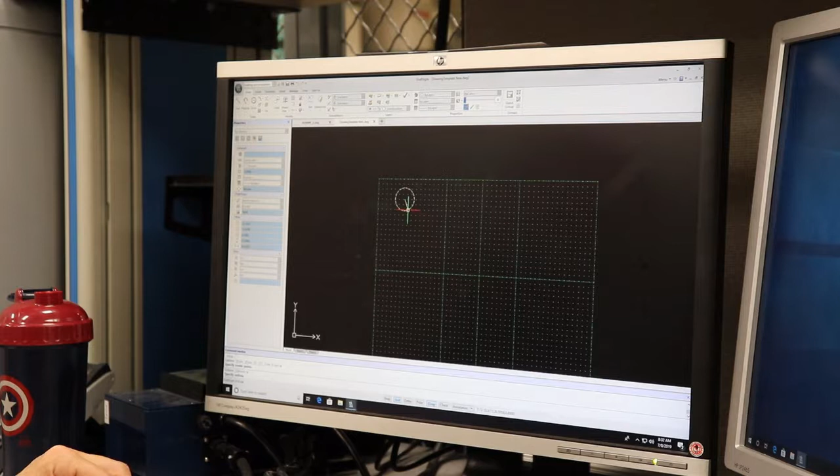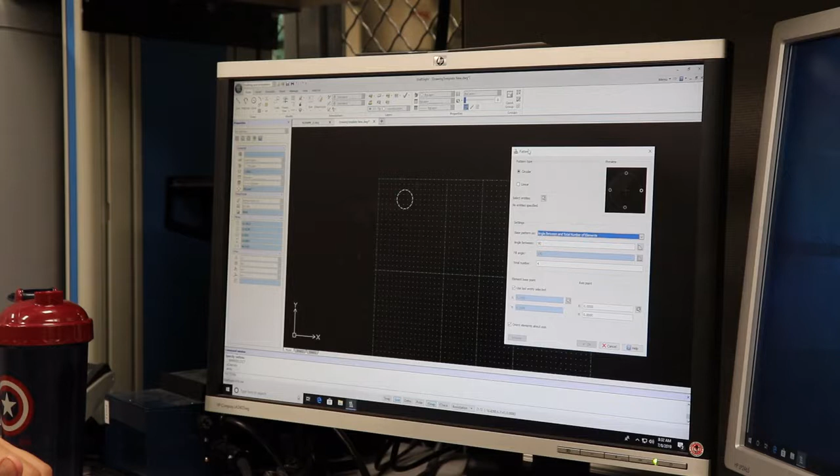So let's see, circle, and I'm just going to put it there, whatever. I'm going to select that. This command in DraftSight is called pattern, but it also recognizes the array command. I'm going to type array - oh, it says 'did you mean pattern?' Yeah, I did. Okay, so linear, form 4, 1 inch spacing, yeah, sounds good. Select entities. Oops, maybe.

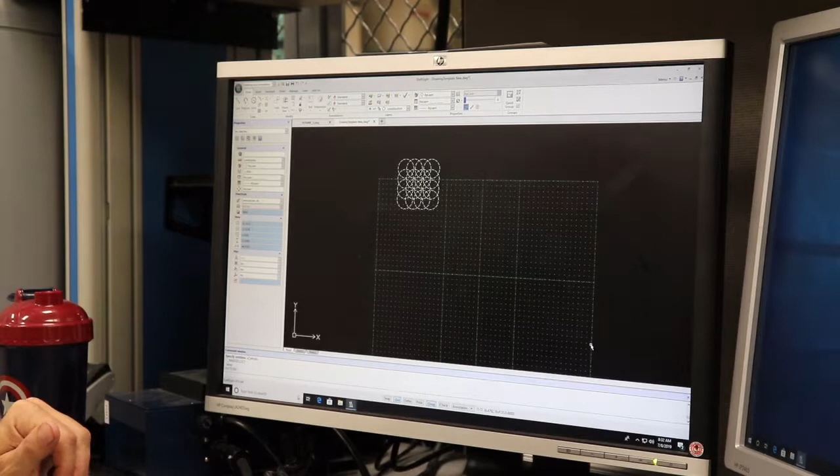So we want to do a linear array. I've already got my entity selected, so it says okay, do this. All right, and there it is. So it's really that easy.

I love being able to type on the command line. That's just what I do. That's how I think, because that's what I learned. So anyhow, here we are.

I'm going to try to find where I saved this last time, because I don't remember. Probably would have saved it under personal. Reamer holder, no. Tool holders - hey, how about that? All right, Cat 40 tool holder top. Open. There we go. There it is.

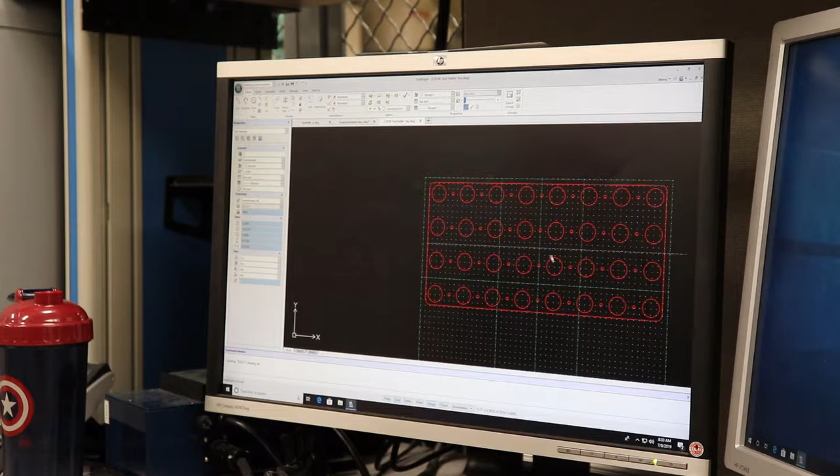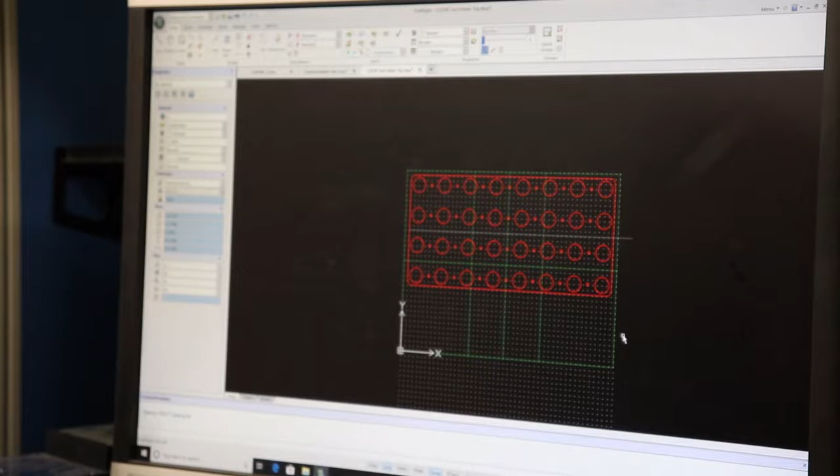All right, so you see this green templated area. All that is a reference for me - this green templated area right here is a reference. This is the cutting area of my laser cutter. Let's get you a little closer to that. So this green templated area right here, that is the cutting area of my laser cutter.

So the way I've got this set up is that I can engrave, I can cut, and I can do construction lines. When I set up this template, I use red and I set up my line types correctly so that if it's on the cut layer, the line thickness is 0. Engrave, it's 0.2 millimeters or larger. And then construction is white, and that just allows me to develop the geometry of my part. Very, very useful.

This is probably one of the more user-friendly CAD programs out there. It does have a few quirks, but I've been really happy with it over the last couple of years.

So that's on a construction layer, on a vector cut layer. Let's say I wanted to turn that into an engrave. Maybe I can find my engrave layer. There it is - and now all of a sudden it's green.

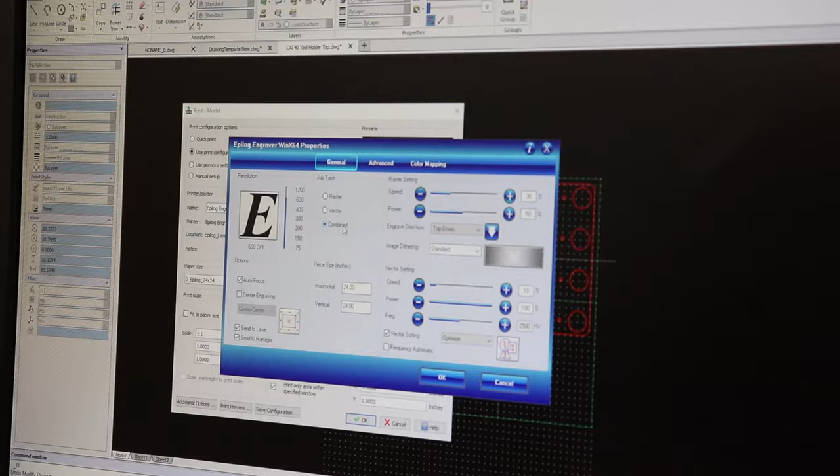All right, and so this is one of the quirks. I press OK because it changed the properties, and then poof, it loses the configuration. It just is what it is. When I first started using this, it drove me crazy. I go back in and check. Now, as long as I don't hit OK, I don't lose anything. If I just exit out of it, it's good.

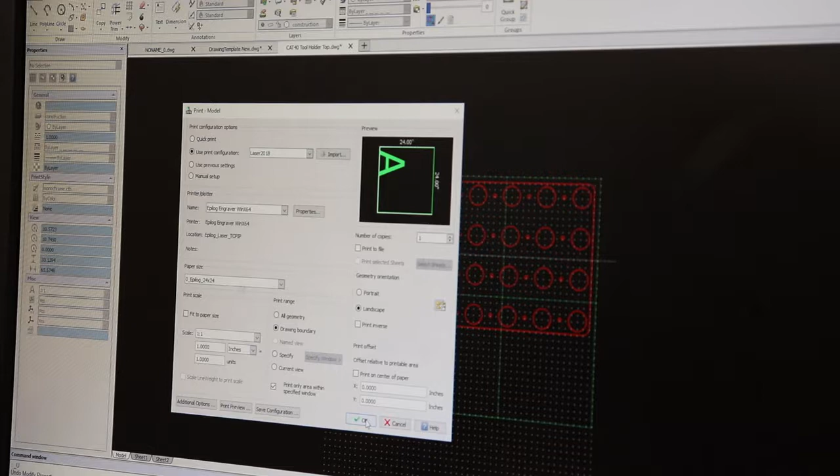And then I'm going to press OK, and it's now going to send that job to the laser cutter. So let's go take a look at the laser cutter.

Okay, so here we are, Epilog laser. This is a 60 watt. The material that I cut is this real inexpensive stuff. It's designed for floor underlayment, and it's called Luan, L-U-A-N. Lowe's sells it, it's about $15 for a 4x8 sheet. I have them cut it with their rip saw at 18 by 24, and so then I use that here in a laser cutter.

So we'll go ahead and turn that on. Alright, so I got air, and turn on my evacuator. Not sure how the directional mic is going to go with that. And so I have it set on autofocus, so it's going to come down. Activate the plunger.

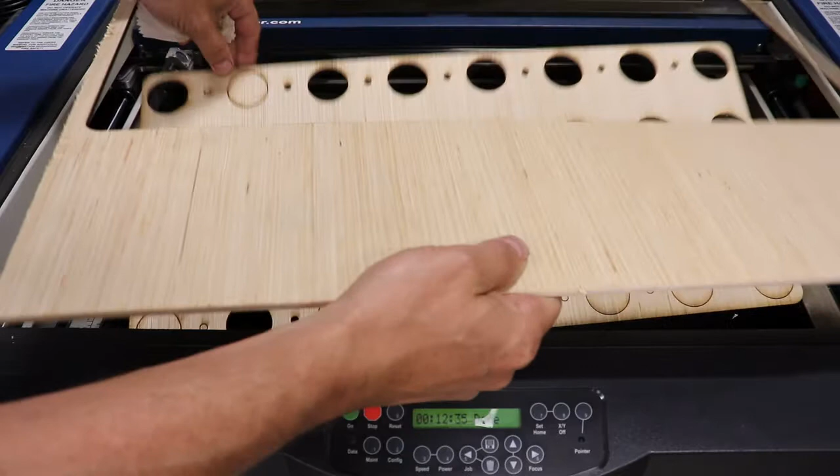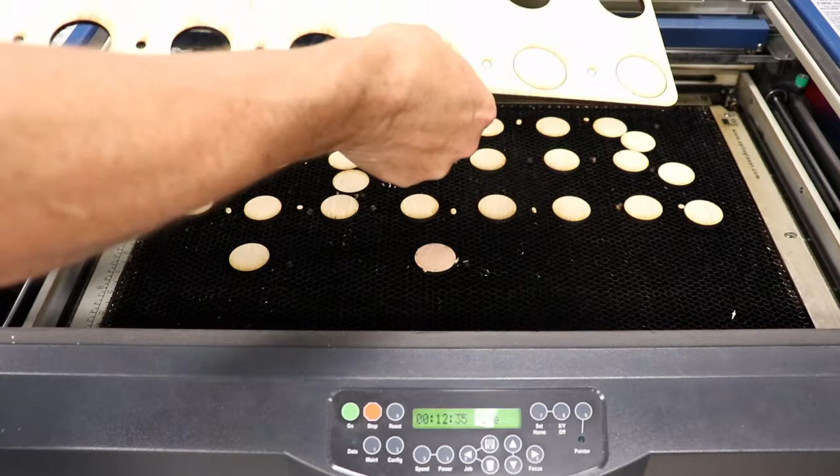Problems with using the Luan is that you don't always get a full clean cut through. It's usually not terrible, but you get spots that don't cut all the way. I could just recut a second time, catch them all, but for something like this, it's not really the right plan.

Okay, here we get ready to start on the bottom. Again, same material, Luan. It has the same outer profile, but all it's going to have is small through holes so that I can screw these two tabs together. So here we go.

Never gets boring watching this thing go. It's kind of mesmerizing. I don't know what the heck it's trying to cut. Apparently I got something hidden.

I went a little overboard with the support holes. I'll probably only use half, maybe not even half, because the supports are kind of a pain thing.

BT40 tooling is heavy, but all this does is sit on the shelf and keeps them from banging around on each other, and keeps them so that you can see them and select what you want.

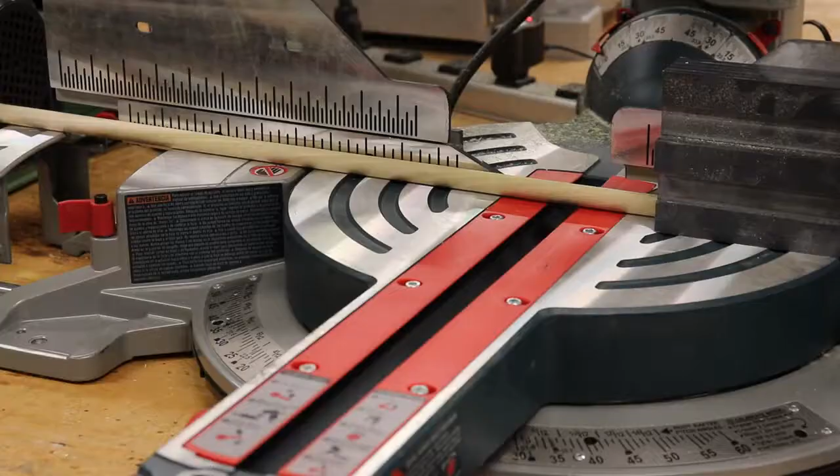So I just set up a stop, and then go through and I cut whatever I need, and that gives me a nice consistent cut on these, and these are the standoffs that go in between the two halves.

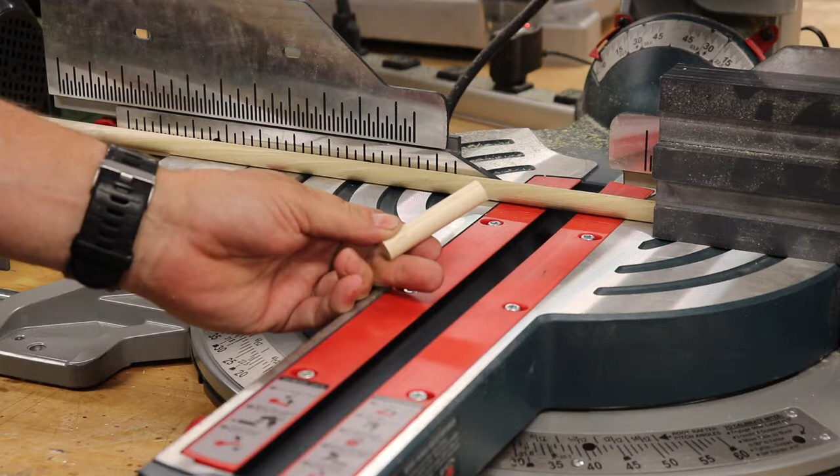Okay, so this is the most tedious part of this whole thing, and I don't have a real good way to get a shot of this. I'm going to try with a GoPro to see if I can capture it, but there's no display on the actual GoPro, so I'm not sure that I'll actually shoot what I want to shoot.

So what I've done is I've chucked up the little dowel in the lathe, and then I've got a number 37 drill bit, 102 thousandths. I'm not going to through drill. These are a little, not quite 3 inches, so I won't be able to through drill it. But what I'm trying to do is just basically make a pilot hole for my drywall screws.

That's what I use to secure it, to actually start in and not split the dowel. Unfortunately, I'm going to actually center drill it because wood is so difficult to do with this. I mean, it's not difficult, it's hard to get it to go without it going sideways.

Okay, so here we go. Yeah, we're really constrained on room here. It is what it is. So I got my speed set at 460.

I've got it chucked up really close, and I'm just going to kind of ease it into the stock. And you can see it already starting to wiggle as it goes out around. Wood is terrible for this.

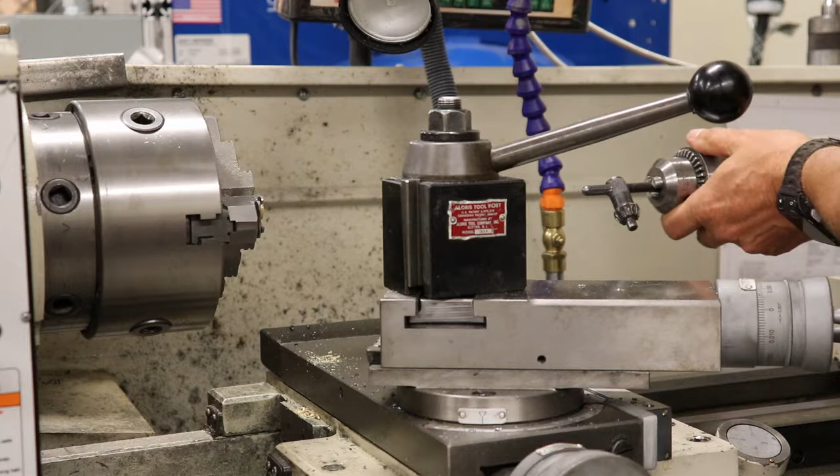And go ahead and clean everything up. Whenever I'm done with a specific operation on a machine, I typically put all my tools back up, clean it up. I use a shop vac extensively for this kind of stuff because it's just simple and easy. Chip brush, put stuff off the saddle. Clean all the sawdust out of that.

It's really not good to cut wood on a metal lathe, but I just don't have anything that's better. But it works, obviously. I'm going to grab my shop vac. Excuse the noise.

Quick and easy, that's how it's done. So yeah, that's one of my personal pet peeves—when you're done with a machine, take a few minutes, clean it, put your tools up, and put them back where they belong, so that way they're ready to go when you need them.

All right, we'll put this thing together now. All right, here we go. Final operation here to put all this stuff together. So we have the top, we have the bottom, we have our standoffs, and then 1.25 drywall screws, and I'm just going to zip those in real quick.

What I found is it's easier just to go ahead and do one side as opposed to another. So I just kind of start it and zip it in.

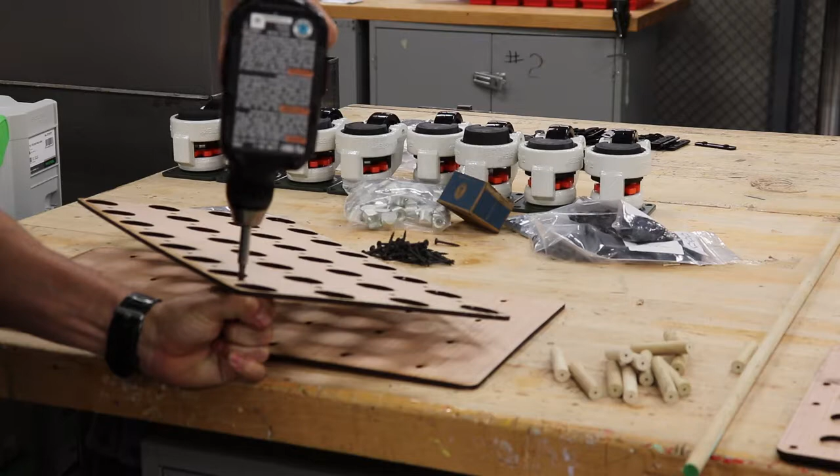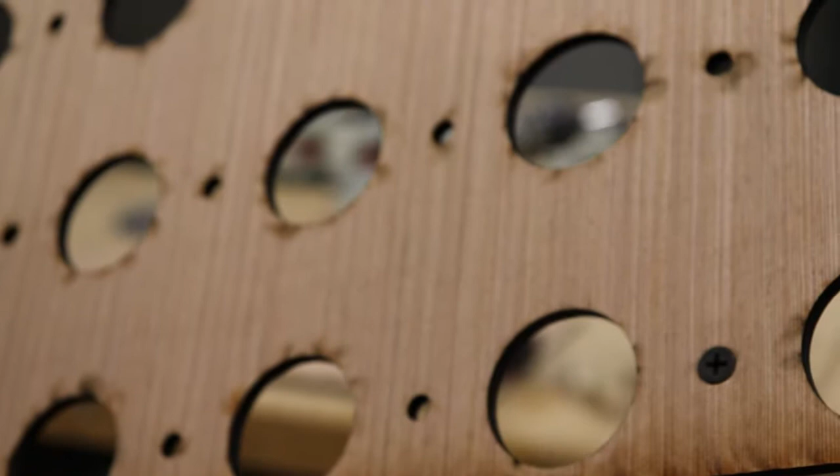And the way that I've got this done—let's get it up here nice and close—is that the hole is just big enough that the head of the screw will sink in a little bit so that it doesn't stand proud, so it's nice and flush. It took a little bit of playing to get that just right. Here we go, back in a moment.

It looks like I'm just going to use 12 to tie this up. I don't know, like I said, I think I went overkill last time. I'm going to try that. If worst comes to worst, I can do some more supports. But as you can see, it was really tedious to center drill all of those twice for each one, so I'm trying to cut that down a little bit.

And then in order to put it all back together, I just set these on top, and I'll line up the very first one, and then zip them all in. Yeah, nice flush finish. All right, back in a few.

I got most of these in. Just got, looks like, 4 more to go. I don't know, I think it'll be fine.

So anyhow, with these holes set the way they are, even if the holes in the standoffs are a little bit out of round, it centers everything up nicely. And this was one of my better ideas. Like I said, I did these very same things for Morse taper tooling as well, and I've been really happy with them so far.